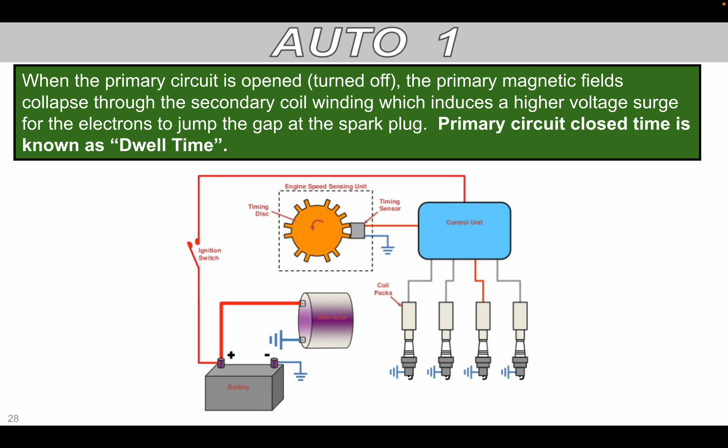We develop that pressure, electromagnetic pressure, in our circuitry. Now we have enough voltage to push the electrons across a gap at the spark plug. How quick does this happen? Milliseconds, too quick, okay, it's extraordinarily fast. Now, the good news is, as a technician, I'm going to show you guys, we have tools that I'll actually get into, and we can measure stuff, and we can use that to actually diagnose what potentially could be wrong with our ignition system without ever taking anything apart, which is pretty fun.

Getting into our direct ignition system, that's going to have an ignition coil mounted over the top of each individual spark plug. So what happened to my ignition coil from yesterday? Did you not just have it? It's in your hand. No, well, this is my coil on plug.

I had my normal ignition coil floating around here yesterday, I'll have to look for it. But anyways, oh no, here it is, it just blends in. Okay, so here's my ignition coil. This ignition coil, back in the day, worked in conjunction with this distributor. So this one ignition coil was producing all of the secondary voltage for each cylinder in my vehicle. So this thing was firing 4, 6, 8 times more because it had to go through all the spark plugs.

And then the electrons that were coming out of this at 30,000 volts were then being distributed to the correct cylinder that needed it because it was reaching TDC through this thing. So this worked in combination with this. Now, thankfully, through technology, we've taken the ignition coil, we shrunk it down, and we literally put it right on top of this. And now each individual spark plug is going to get their own individual ignition coil.

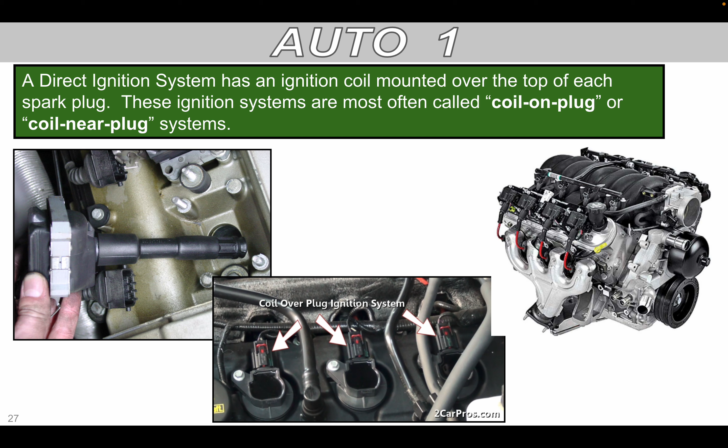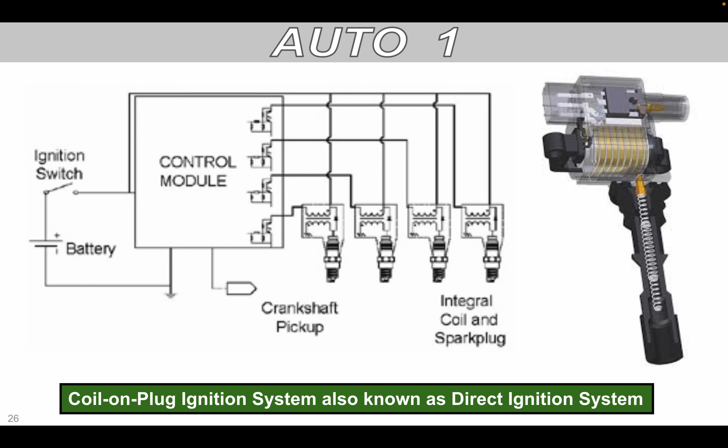All right, an ignition system uses this to change battery voltage into high secondary voltage.

You gotta hold it up a little higher. You gotta get off your phone for 4 seconds. Hey, where's the thing that shows you? They got you, man. Yeah, that's only on bell ringers. I think I got everybody. We'll find out. All right, 3, 2, 1.

Okay, hey, 79% of you guys got this correct. Juan, what'd you pick? C. C is the correct answer. Coil, okay.

Our ignition coil converts the 12.6 volts on the battery into 30,000 secondary volts for our ignition system.

Ignition coil, yeah, you should get new ones of these after that, so. I should. Thank you for the suggestion. Yeah, I know, that's what happens when people are using and abusing it, right? They draw on things all the time. I was picking B when I was trying to pick C.

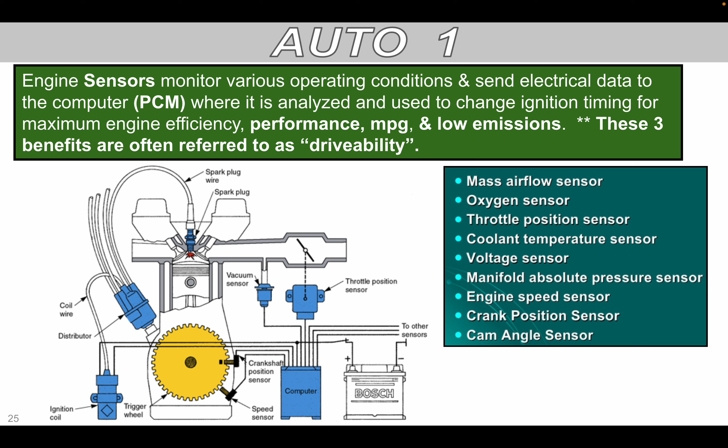Anyways, drivability - so anytime a vehicle manufacturer talks about the drivability of the vehicle, increased drivability, they're talking about the increased performance, miles per gallon, and lower emissions that's happening because of that engine. And the ignition system has a lot to do with that.

How does the sensor know when to tell a computer to fire the spark plug? Well, one of the sensors is the crankshaft - hold on, I'm not going to get into the sensor quite yet. We're going to get into the crankshaft trigger wheel. That is a term - a vocabulary word. Crankshaft trigger wheel, could also be called a reluctor ring. Those two names are interchangeable, depends on who you talk to. I'm going to say trigger wheel just to keep it consistent with what we're talking about so it's not confusing. You can see here that trigger wheel on the outside of the engine.

Here's my vibration damper. So what part of the engine am I looking at? The crankshaft - this bolt right here is bolted right into the crankshaft. So what part of the engine, front or back? Snout, which is in the front of the engine. So at the front of the crankshaft. On this particular one, the trigger wheel's on the outside so you can actually see it - it's bolted directly onto the crankshaft. Can you see that?

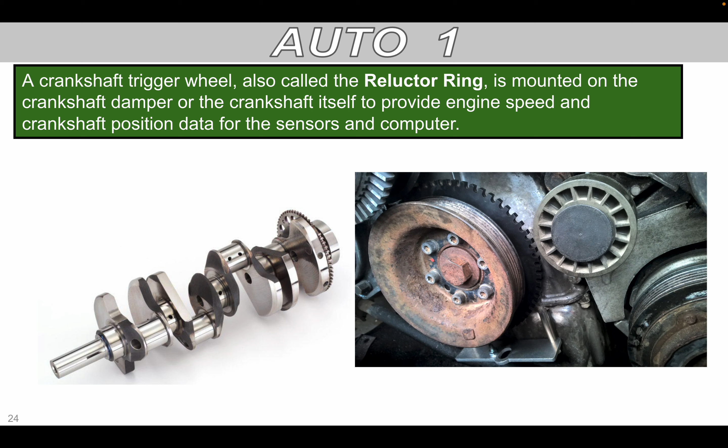Now the fun part about the crankshaft trigger wheel is that it's missing one tooth. Literally missing a tooth. We got teeth here, and all of a sudden, a missing tooth. So if someone doesn't know what they're doing, they might look at it like it's broken. It's so it knows how many laps or rotations.

Every time this goes around, that missing tooth sends a very specific signal to the computer, once per rotation. Now here's the fun part: what does that missing tooth represent? Top dead center of cylinder 1. That is very important to know.

How do you tell where it is when you install it, like when you move the crankshaft so the piston's at the top? Part of the engine building process is everything goes off of TDC of cylinder 1. Everything. So when you're building that, you're manually moving it around once everything's ready, using a dial indicator to make sure you're at TDC of cylinder 1, and then every time, everything goes off of that.

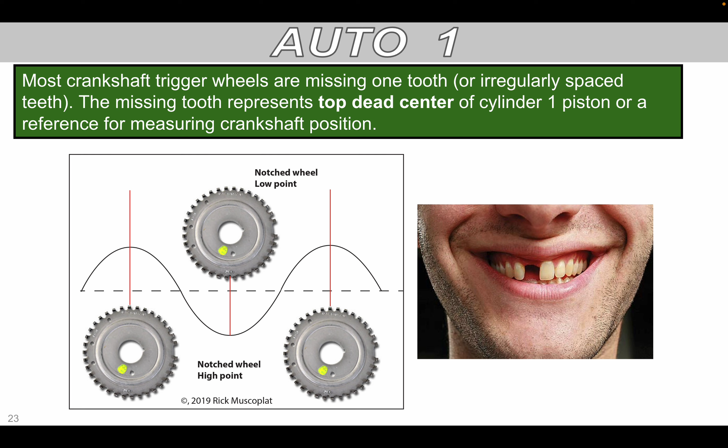And that's because the engine has a firing order. Cylinder 1 fires, then typically cylinder 3, then cylinder 4, then cylinder 2, at least in a 4-cylinder engine. There's a sequence there that repeats after one another, so it's important to understand that firing order. The computer expects that firing order, and that's how it knows where it's at.

So the crankshaft position sensor, that's another vocab word we need to get down in your notes. This particular sensor works in conjunction with the trigger wheel, and it literally picks up the signal as this trigger wheel is moving around. Let me move this out of the way.

So as this is turning, you've got a tooth that's high, low, high, low, high, low. As that keeps going around, this little sensor is called a Hall effect sensor. You don't need to know that name, but basically it's a magnet. As this tooth gets super close to the magnet, it induces a voltage, so now I've got a higher voltage. Then as this rotates to the valley, the low part, the voltage is less because it's further from the sensor.

Then as this tooth gets closer again, we get an electrical signal that looks like the teeth. Now I'm not going to get into the weeds of this, but basically the computer sees this as on, off, on, off, and it literally counts that.

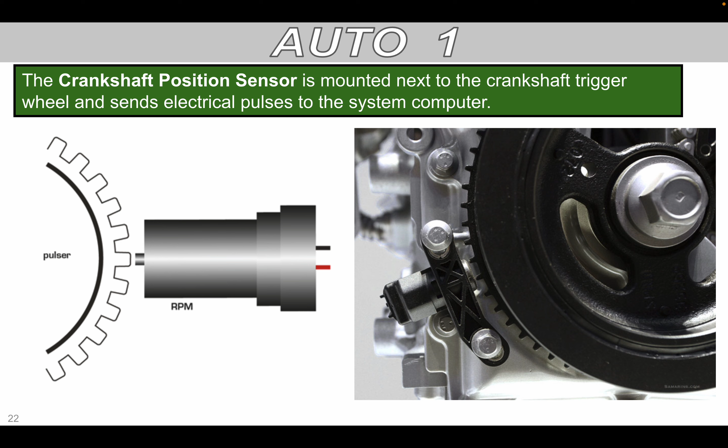There's a slight difference between those two. Again, as the crankshaft spins, the crankshaft trigger wheel and the crankshaft position sensor or sensors produce an on-off voltage signal representing crankshaft speed and position. Again, this is what it might look like if I were to look at it as a computer, and it sends that signal as a voltage signal. I'm not going to get into the computer side or electrical side of that because that can get a little overwhelming.

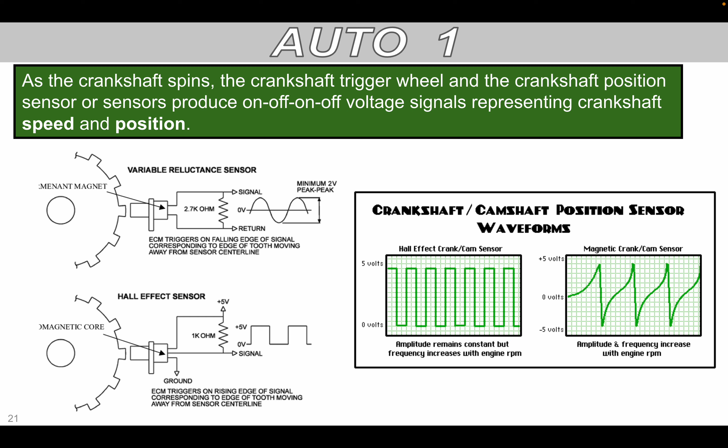But again, this trigger wheel and the sensor, they never touch. It's in proximity to one another. That's what the computer sees, that's how it can read it. It's kind of the same way as if I walk into a room and there's no light, I can't see it, but I can hear something and I can kind of tell maybe where something's at. We're using our senses to figure things out.

The camshaft position sensor operates basically the same way as our crankshaft position sensor does. The only difference is the camshaft position sensor is monitoring the camshaft and its rotation.

Why would we want to do that? We know from engine fundamentals that the crankshaft is actually hooked up to the camshaft with a timing chain, and we know that the crankshaft is actually forcing the camshaft to rotate to open the valves, right? So why do we need to monitor the crankshaft and the camshaft? Can't we infer where the camshaft is based off where the crankshaft is? The answer is yes, you can.

So why do we need to monitor the camshaft then? This is a very high level question, by the way. Chase, are you understanding this, or are you still looking at your phone? No, I understand. I think you're lying to me. But hey, I understand it now. Which one?

I'm going to take you back here. This will be our last slide here. I'm going to take you back to our engine fundamentals presentation way back in September. This is why we can't forget this information, because it builds off of it. If I've got a crankshaft, how many times does that crankshaft rotate for every 4 strokes in the 4-stroke cycle?

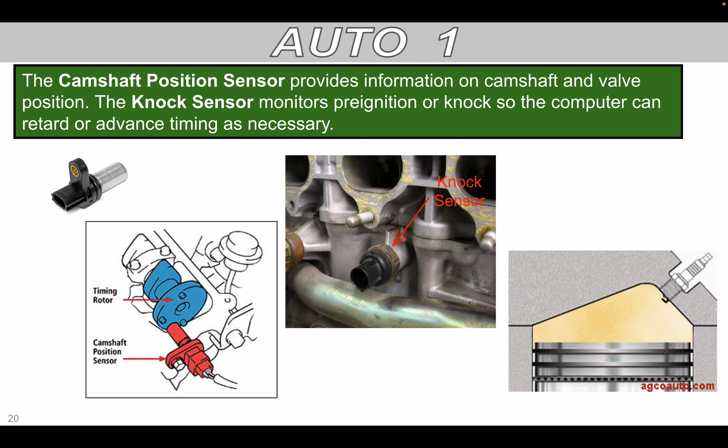Is that what a door bell is for? Knock sensors? The what? Knock sensors? Is that what a door bell is? I guess you could say yes.